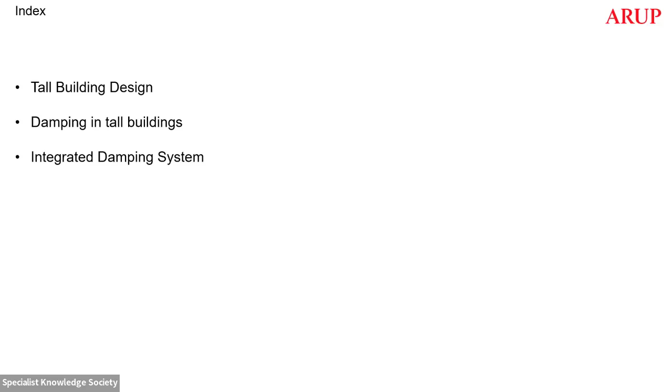I've worked through my career on a series of tall buildings. You can see a few of them. The one I'm most proud of is the last one, BDO Unibank headquarters, where Pedro, who's sitting in the audience, also helped me work on it. It's now under construction, so let's see what happens.

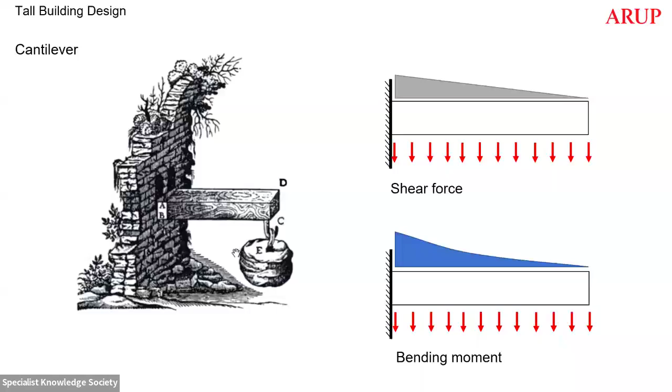If you go straight into the topic of damping in tall buildings, a tall building is as simple as a single cantilever, where you have loads which are the horizontal winds applied to it. In a similar manner to any normal cantilever, to have an efficient cantilever you want to make it as deep as possible and concentrate the masses at the corners. That's the same as we see in a tall building, where we have a vertical cantilever with a horizontal load applied to it, call it wind or seismic. That's the basic behavior. There's nothing more complex than that.

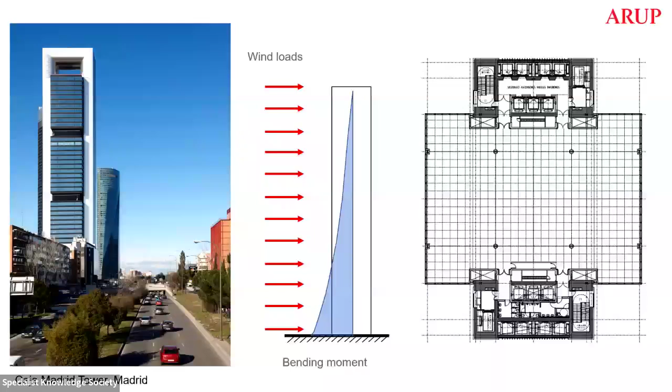What we want to do, same as with a standard beam, is place the mass at the ends and have them as far apart as possible. That increases our stiffness and efficiency. It's not the same having a chunky beam as having a relatively deep and slender one. We generally place structural mass, referring to concrete, because concrete behaves really well in compression and adds stiffness to the building. It's a really good material for tall buildings.

The example I'm using is the Caja Madrid Tower in Madrid, where the two cores are very efficient because they're connected and the structural mass is far away from the corners. We have a weak direction, hence the mass is concentrated at both ends in the other direction as well. But it's as simple as a tall cantilever, and the same applies to the Commerzbank tower.

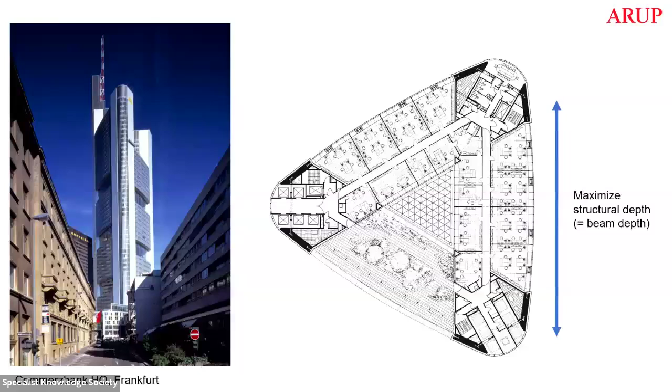The purpose is to make our beam as deep as possible, so we place structural mass at the ends. Sometimes there are other constraints - that's the beauty of tall buildings, there are so many things interacting that you cannot over-design. You have to be very efficient. There are many interactions in construction, services, views, fabrication, so there's variety: a central core, which can sometimes be beneficial, or mega frames. It all depends on your specific site, your program, and what you're trying to achieve.

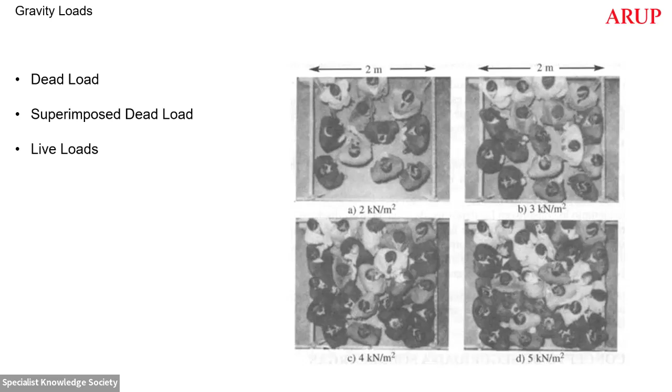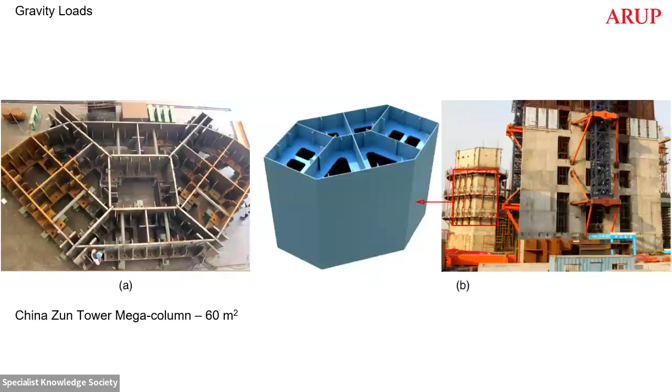And that is especially because loads matter. This is the column at the ground floor of the China Zun Tower, which is a 60 square meter column, quite a large apartment. You could actually live within that column, so it's a question of whether you want elements that size in your building, or if you can make them more efficient, because it adds a lot of value. It's not so much reducing them as being smart about it.

But then if we go to lateral loads, we have wind and seismic. Starting with wind, tall buildings are generally investigated using a wind tunnel test. The Eurocode tells you that the moment you're above 200 meters, you need to use a wind tunnel, or for certain slenderness ratios. There's a series of parameters, but it's the standard approach for any tall building.

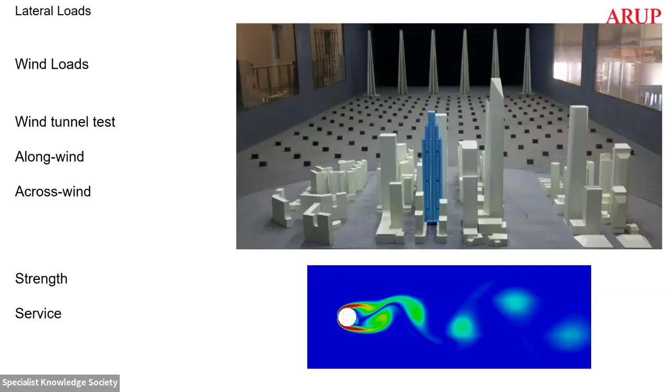Moreover, in the wind tunnel you also check for strength and service. On one side, the ultimate limit state at a 700-year wind, to prevent the tower from collapsing in the maximum storm, but also the service condition - what is the 25-year or 50-year wind for drift and top displacement. And also what ends up governing tall buildings, which is accelerations.

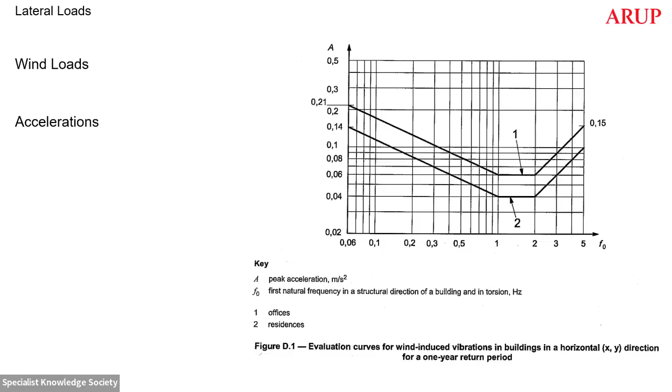Tall buildings tend to be governed by accelerations, usually with a 1-year return period, also evaluated in the wind tunnel. As users, we don't really perceive movement or displacement, but we are really good at perceiving acceleration, translational and rotational. That depends on what activity we're doing - if we're lying in bed we're more sensitive, if we're walking, less. If there's music playing, there's a series of parameters that make us especially susceptible to whether a tall building is moving or not.

Then if you go to seismic, we design it like any other building, following capacity design principles. We identify a series of elements that behave as fuses and dissipate energy. For example, one of the most common things is using concrete cores with coupling beams joining them, and the coupling beams yield in tension and crack in compression. It's like yielding, behaving in a flexural manner to dissipate energy through cracking and yielding of the reinforcement. Therefore, we're able to reduce the seismic loads in the building and avoid over-designing it to remain elastic under a seismic event, as we would with any other building.

The difference for tall buildings is that right now it's very common for any tall building to do performance-based seismic design. Many codes prevent you from doing certain tall buildings, or a relatively efficient version of them, using code procedures alone, so you need performance-based seismic design.

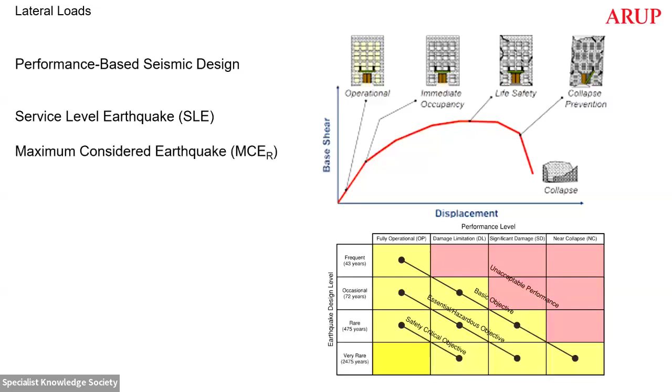What you do there is assess the behavior of the building under the service level earthquake, which happens every 43 years, to ensure that it remains fully operational, and under the maximum considered earthquake - the risk-targeted maximum considered earthquake, which happens every 2,500 years - you want to prevent collapse. For other types of buildings, say airports or nuclear plants, you might have other objectives. That's what performance-based design is about - it allows you to go slightly beyond code, but only checking the serviceability and ultimate limit states.

What we generally design the building for is to remain elastic under wind, and only start dissipating energy and experiencing damage after wind loads have been exceeded or the service level earthquake. In this case, the wind loads are the solid lines and the service level earthquake are the dashed lines. Wind loads were almost double the seismic load, so wind was the one governing the design.

If we were to check the maximum considered earthquake, the base shear is way larger than wind, but that's when we say, okay, there we can accept damage in the material, we can use expected material properties, we don't need to use nominal for all elements - there are more things we can do.

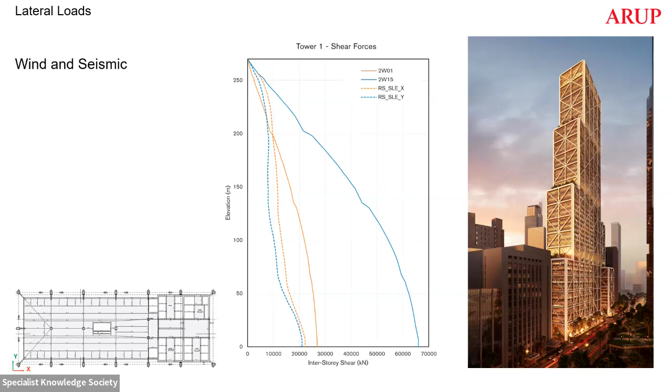But then, as a quick summary, what we always find is accelerations tend to govern. Or if not, it's top building displacement or interstory drift - accelerations tend to be the more common thing. And in order to make sure wind-induced accelerations are within comfort limits...

As the graph I showed you before - you get the wind tunnel test, you get your acceleration in your building, you go to that graph and identify where you are, whether it's for a residential or an office floor, you take each line. If you're above it, it means your building shakes too much and you need to bring it down.

In order to do that, you can either stiffen the building, add more structures, increase the structural sizes, add more elements - which is what was done 50 years ago, but it has been proven that it's not really efficient, besides being costly and expensive.

Then what you can also do is shorten the buildings - sometimes you make it a bit shorter and get less wind loads. Or you do aerodynamic modifications, such as cutting the corners or twisting it. However, cutting the corners means you're losing space, or shortening serves the same purpose - so to what extent it pays off is a question that needs to be looked at.

However, one of the most widely accepted approaches right now is just to provide supplementary damping - that's the most widely accepted solution.

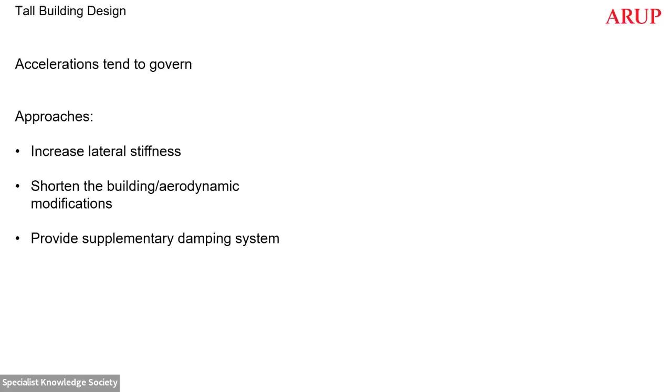So, what is damping in tall buildings? Damping is the capacity of a system to dissipate energy - for example, if we take a ruler and pull it, fixing it at the base, it's going to start vibrating, but the vibration is going to little by little reduce. The rate at which it's reduced is the level of damping. If it has very low damping, it's going to vibrate for half an hour; if not, it's going to stop really fast.

Buildings typically have - well, before I go into that, it's important to note that both wind and seismic are dynamic loads. They're not going to apply to the building as static, even though sometimes we might check them that way. Therefore, damping has a really big impact on how the building behaves dynamically, especially under resonance.

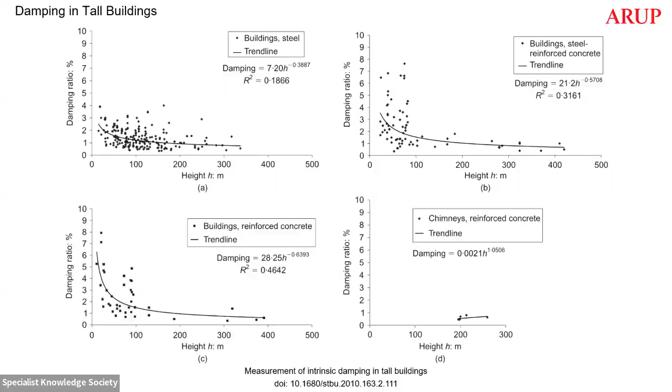Typical buildings have a 5% level of damping, but tall buildings, as we increase the height, the amount of intrinsic damping reduces - a 300-meter building might have around 1% damping. It's also worth noting that this depends on the type of material - you get one value for steel, a bit more for concrete.

But even so, if we think about what is generating damping in a building - it's cracking within partitions, movement within steel connections, heat dissipated. It's sometimes assumed that the more amplitude you get in the vibration, the more damping you're going to generate, but that's not necessarily true, because once all the cracks in the partition have opened and the seals for the facade are broken, you might actually experience a reduction in damping.

So that's one of the points as well - you have to be relatively careful if you assume a relatively large value of damping for your design, because in reality, there's going to be hysteretic damping.

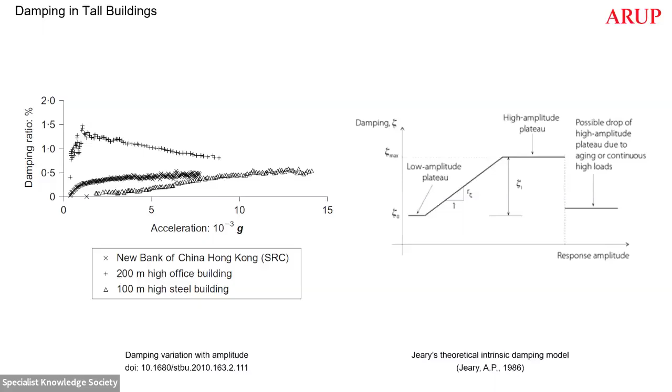For low-rise buildings, you do want large levels of damping. For high-rise with 6 or 7.5%, you're already mitigating most of the dynamic response. You don't really need to aim for 30% damping.

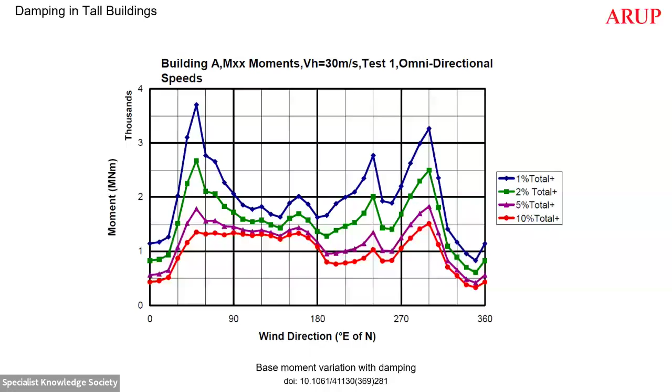We have seen in the East Japan earthquake, and many other recent ones, how many buildings experience large accelerations that lead to significant non-structural damage, which is way more expensive than structural damage, and can lead to significant downtime. That matters for commercial purposes, or even life-critical situations, and can have a really big impact on the community after seismic events.

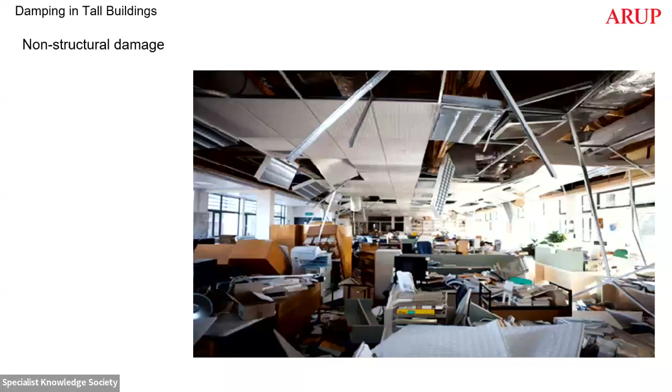So based on all of this, what are the benefits of damping? They can help control wind-induced accelerations, which is mostly why they're implemented in tall buildings, as I'll show you later on. It improves dynamic response, therefore it can improve seismic response, and it can reduce wind-induced dynamic effects.

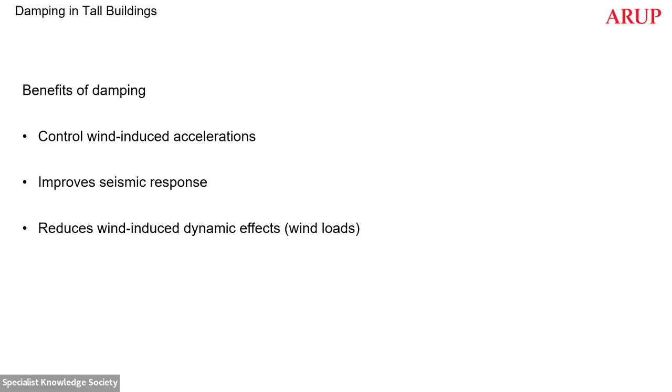If we have a damped system, we can reduce the wind loads because the building is not going to move as violently as before. It's going to be smoother, therefore less demands, and we get savings, as we saw from the plot.

In terms of types of damping systems, we have passive, active, or semi-active hybrid, depending on the level of interaction with excitation. Japan has some active systems relatively well spread, but the most common ones are passive systems. That's because they're more reliable. They don't rely on any kind of energy or active input, which you might or may not have during a seismic event unless you have generators, but passive systems are the most common ones.

In a similar manner, they can also be categorized as distributed or mass dampers—distributed if there are many elements along the height of the building, or a mass damper, which just uses a mass. If you look at those two categories separately, I'll try to give a small explanation.

Okay, what are the examples now on buildings? There is no single answer for what is the best damping system. It's more a relationship—it depends on every single case which one is more applicable, because each one has their pros and cons. Therefore, I think it's also worth seeing them.

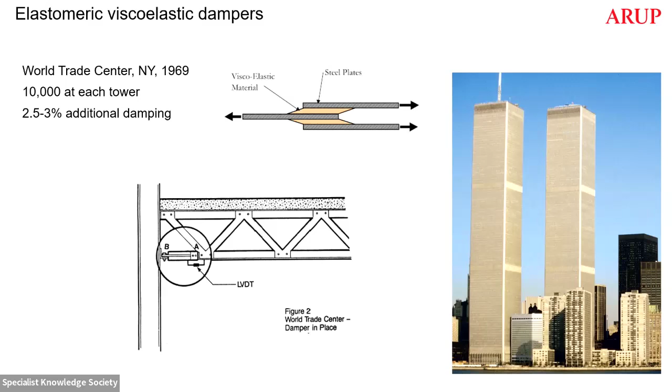The first application of a damper was in the Twin Towers in New York in 1969, where they used elastomeric dampers that dissipate energy by shearing, connected at the bottom chord of the truss to the facade. They were able to generate 2.5 to 3% damping with 10,000 elastomeric dampers. They became really popular to mitigate wind-induced vibration.

For example, on the Columbia Seafirst Center, you can see these very large braces everywhere. They were able to generate up to 6.4% damping—a massive amount of damping.

However, the drawback of elastomeric dampers, especially back in the time, is that they dissipate energy via shearing and dissipate it within the damper as heat. However, they have temperature-dependent properties. So under large seismic events, the material will experience significant damage, and their use reduced once fluid viscous dampers became available.

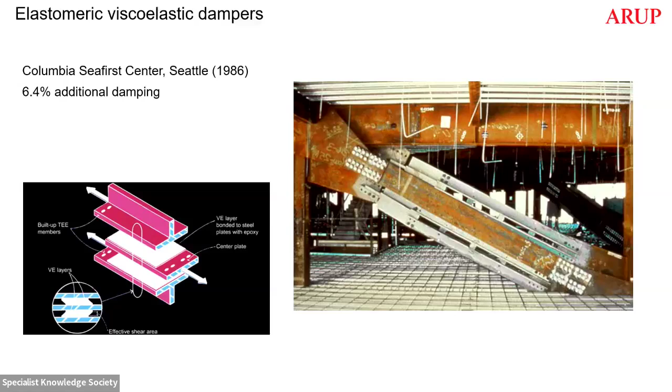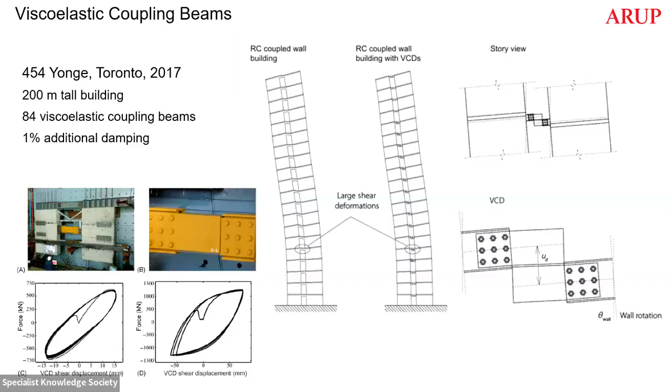Materials have improved throughout the years. A new and interesting application is viscoelastic coupling beams, where rather than concrete coupling beams, we have a series of steel plates with elastomeric material in between, dissipating energy through shearing as the tower sways from one direction to another. These have been implemented in several buildings and tend to show robust behavior even under large wind events.

They generate damping through the differential motion of both ends, passing fluid—typically silicone—from one chamber to another. Interestingly, they cannot resist any static load. This is essentially a shock absorber of a car without the spring, so if you push them, they yield. They can offer resistance to dynamic loads, but it's important to know you cannot rely on them to resist a static load.

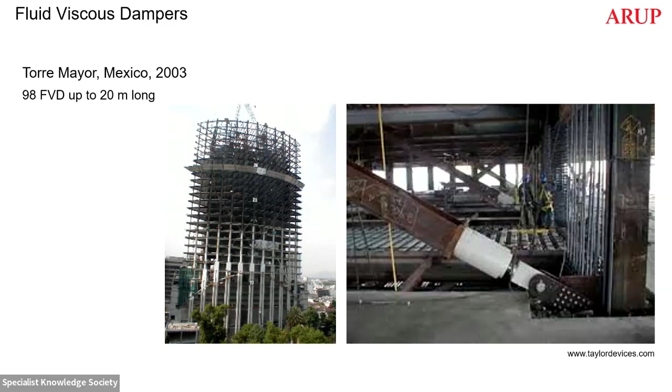They can also dissipate very large levels of energy. They were implemented in the Torre Mayor in Mexico, one of the first cases for seismic applications, where 98 fluid viscous dampers up to 20 meters long were installed, and they proved successful in resisting seismic events.

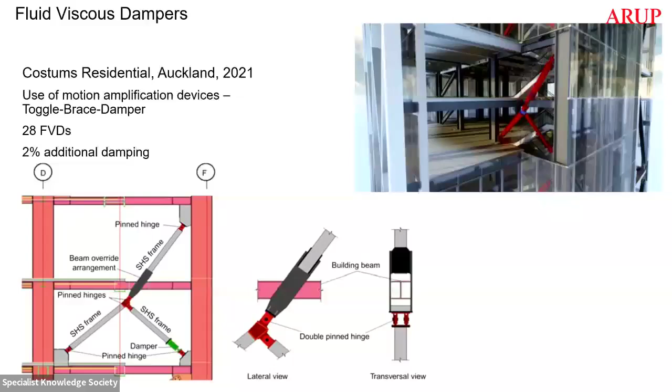More recent applications include motion amplification devices to increase the level of damping achieved, which is one of the challenges with distributed dampers—they rely on differential motion between both ends or damper cells, but in reality tall buildings don't experience very large interstory drifts. They behave more in a flexural manner; a thick core wall at the bottom, say 1.5 meters, won't move much from one floor to four meters higher. So for tall buildings, you generally need mega braces, as shown before for Torre Mayor, motion amplification devices, or other systems that increase the differential displacement between both ends.

That was the same approach for the Scalpel here in London, where we used mega braces around the facade, concentrating the movement from the top down to the setback level to provide the fluid viscous dampers at those points, concentrating the differential displacement over the height. In this case, it was done for wind applications. Interestingly, the dampers cost less than 200,000 pounds but enabled savings of 2.5 million compared to a TMD, and saved up to 2,500 tons of steel along with the proportionate carbon emissions—a very large number that can bring substantial savings.

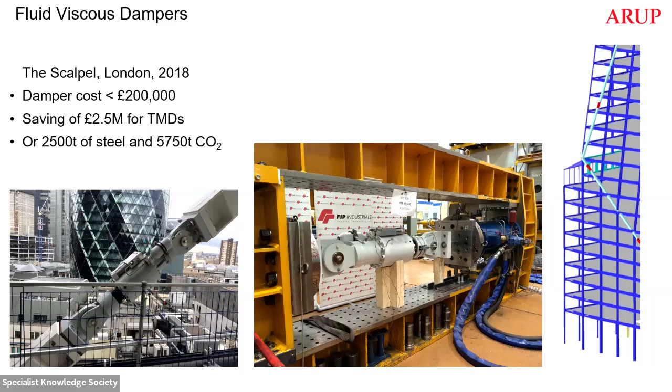Another building I really liked was 181 Fremont Street—really impressive how everything was done. In this case, it was designed for both wind and seismic loads, with dampers working in parallel with buckling-restrained braces, but also using the same concept of mega braces connecting two points at the corners of the building, concentrating the differential displacements on those elements.

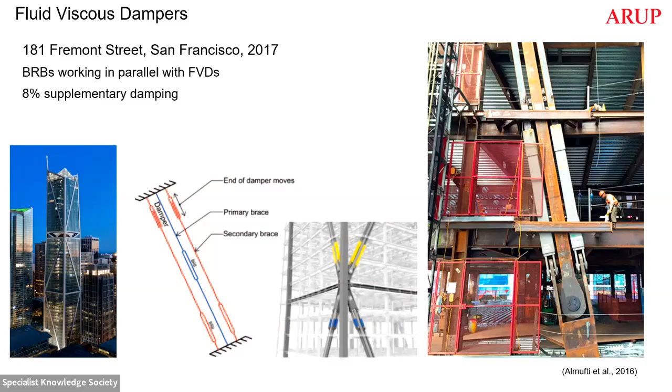Another application is where we want to concentrate large movements or large forces, and we can place the damper there. Rather than having a conventional rigid outrigger, since the outrigger connects the core to the mega columns to stiffen them up, you can replace a solid connection with a damped connection. The good thing about this is that you get really a lot of damping.

The reason it's sometimes beneficial to have a damped outrigger versus a rigid one: for example, these towers in Manila have very high winds and very high seismic demand. These are residential towers, more sensitive to accelerations. If you connect rigidly, you decrease the wind response, but you drastically increase the seismic response, making your building more rigid.

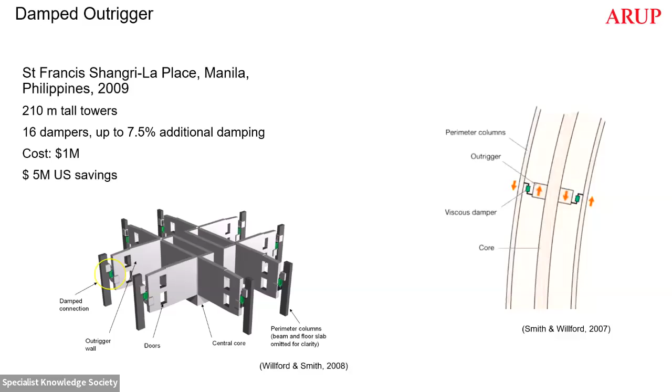Interestingly, these fluid viscous dampers have a very large damper coefficient. They had vertical fins to dissipate energy, and a valve designed with a nonlinear damper exponent. So if there is a very large seismic event, to avoid inducing excessive force in the outrigger, once you exceed the threshold the valve opens, reducing the effect of the damper outrigger and softening the building considerably.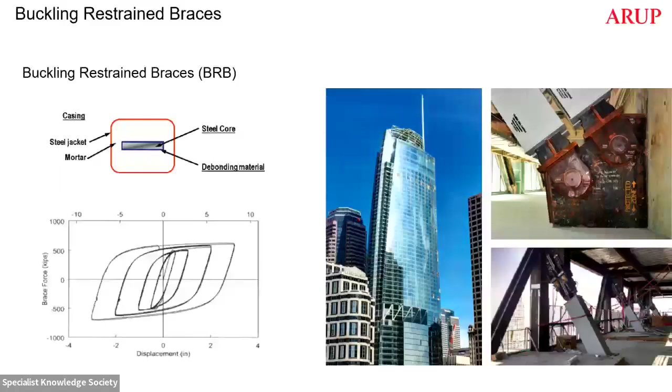Another system, different from the previous one, is buckling restrained braces, which fit within hysteretic devices - ones that experience damage mostly for seismic applications through hysteretic behavior, basically yielding. Buckling restrained braces are formed of a steel core with a concrete encasement. The steel core yields in tension and compression without buckling, thanks to the concrete encasement, providing a very robust energy dissipation mechanism under cyclic behavior compared to normal braces that would yield in tension and buckle in compression.

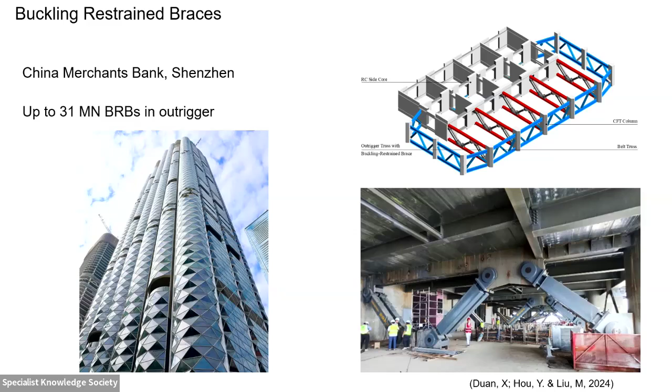We did this for a project for China Merchants Bank - there's a really good paper by Xiaonian, Yuqi, and Minsheng describing it, where we have up to 31 meganewton buckling restrained braces working in parallel for the outriggers to engage the core with the mega column. Also for the BDO Unibank headquarters in the Philippines, we used 19-meter long buckling restrained braces.

The good thing about buckling restrained braces is that you can use them to increase wind stiffness against wind demands, but whenever you exceed that wind demand, they start yielding and dissipate energy in a seismic event. This is an image from Perform 3D showing how all the braces were yielding - once the seismic demand was exceeded, the braces were yielding and dissipating energy.

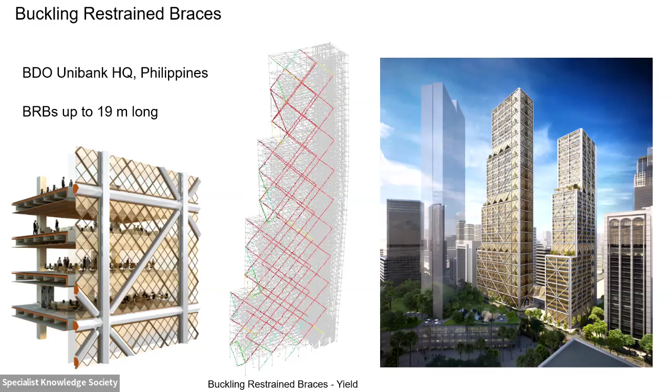Looking at the time history, we see that the buckling restrained braces were responsible for 65% of the energy dissipation. This uses nonlinear response time history analysis, which tracks how the building responds when subjected to an earthquake - the energy dissipated by different components, how much it moves, you can track all of that. We can verify that the dampers perform a really good function.

The last one in terms of distributed dampers is friction dampers, which are now picking up quite a bit - that's for the Abeno Harukas Tower in Osaka, a 300-meter tower, the tallest in Japan. This one has all kinds of dampers: friction dampers, hysteretic, oil dampers, ATMD, dissipating energy by friction at the connections.

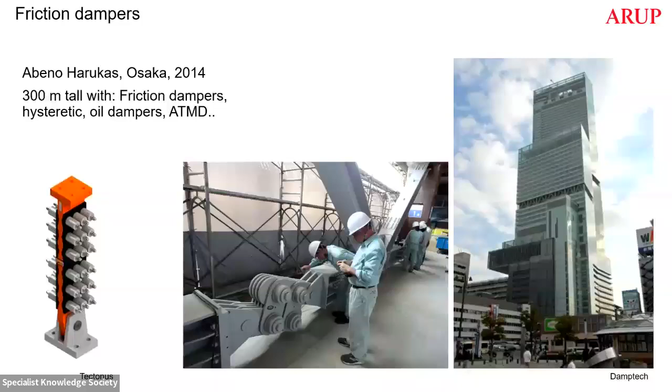The one you see on the left, by Tectonus, is different in that it includes self-centering capabilities, which addresses an issue with buckling restrained braces or friction devices: you have inelastic behavior, but that means extension or rotation in the case of friction devices, which can lead to permanent displacement and offsets in the building that you need to correct later on.

And before we go to mass damping systems, one second.

So that is the thing about distributed damping systems. They're really good because they're frequency independent. They can work really well for seismic response. They're redundant systems, so you can account for them to not just reduce acceleration, but also improve seismic response and wind response. But they're relatively inefficient for tall buildings because of that very small interstory drift and the fact that you need to connect them really far apart to concentrate the movements of several portions.

Mass damping systems are probably the most common ones in tall buildings, and the most common of all of them is a tuned mass damper. A tuned mass damper is based on the vibration absorber: if we have a main mass which represents the building, since every building has a natural frequency at which it vibrates, we add a mass to the top and tune that mass with a spring and a damper to match the frequency of the building, so it vibrates out of phase with the building and therefore creates an equal and opposite force as the building moves. They generally have a mass ratio of 0.5 to 1% and can generate from 2 to 4% damping.

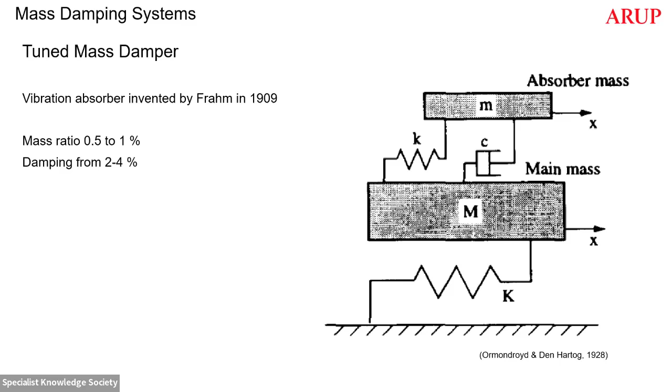Another example could be the Shanghai Tower, where you have a 1,000-ton TMD hanging at the top. As you can see here, the bad thing about TMDs is that they take a very large space at the top of the tower, where space is more valuable. You can imagine the value of all the area that is taken up, especially at such a premium location.

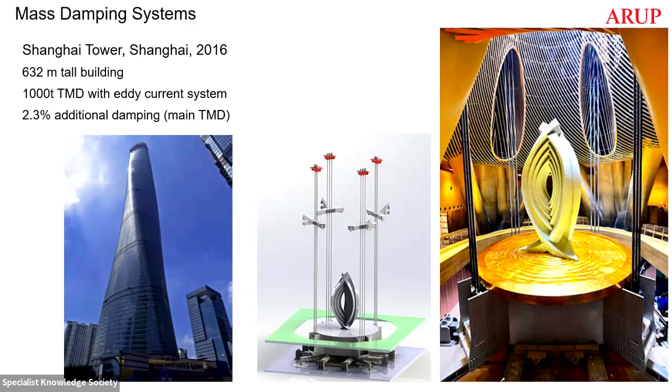But still, they're very popular because they're really good at controlling wind-induced accelerations. They're way better than increasing the size of the structure.

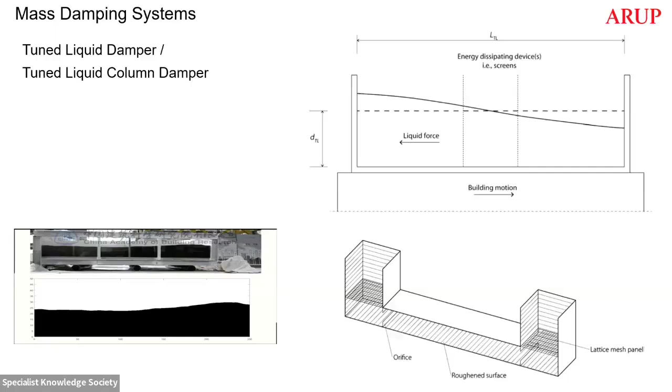Another application could be the tuned liquid damper or tuned liquid column damper, where you use a water tank at the top of a building with some baffles or screens, and dissipate energy as water crosses those screens through friction and viscosity. You need to tune the size of that tank to match the frequency of the building as the water moves from one place to another. That was what we did for China Merchants Bank, where there were 2 water tanks, one on either side, able to achieve from 0.6 to 1% damping depending on the wind scenario.

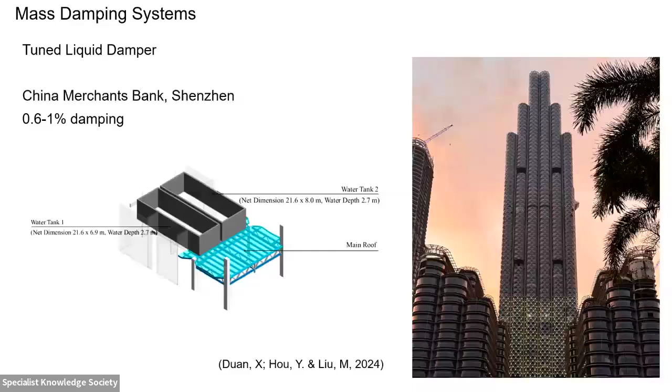So, that was a bit of an introduction to dampers. One of the key themes is that dampers are generally represented by the same 2-degree-of-freedom simplification that I showed you before. We have the main structure as the first degree of freedom, the first mass, and the top mass is the mass of the damper. That's usually accepted and works, giving really good predictions.

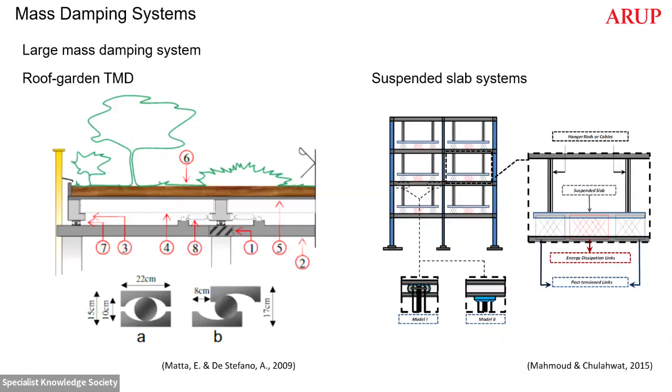There are many researchers investigating, for example, what if we use a roof garden TMD, where you have a heavy garden at the top, which is what many people dream of, and you can tune that to match the frequency of the building? Or what if we suspend every single slab and tune that suspension to match the frequency of the building?

You need to double the structure, with a few implications. Another option is an intermediate mass isolation system - what if we break the building at mid-height and put the top part on elastomeric bearings? Rather than base isolation, we have it mid-height, with the top part behaving as a damper. That's also picking up in Japan right now.

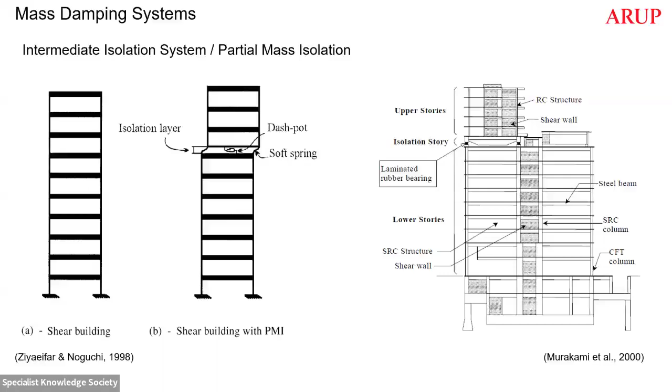Tokyo has just finished one of two buildings of a plot, the Shibaura Tower, where we have a 50-meter portion moved as a partial mass isolation. This works really well for low rise and mid rise, but once you get to a high rise, you're actually creating a soft interface. So in that case, they incorporate an active TMD damper at the top to counteract that. It's beneficial for damping and seismic, but can be detrimental for wind-induced vibrations. It depends on every case.

That takes me to the integrated damping system, which builds on everything we've seen so far. Looking at everything, we know that mass is the parameter that most influences the performance of TMD dampers and how much damping they can generate. But we also know that for a given target damping value - say you want to generate 2% damping - the more you increase the mass, the smaller the differential displacement between the main mass and the damper mass.

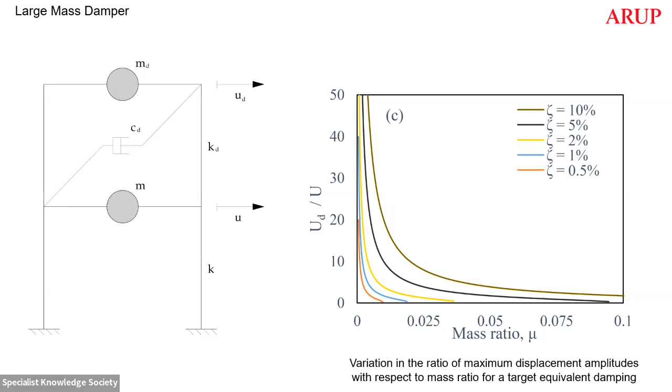Moreover, as we increase the mass, we also increase the robustness of the system. It's less sensitive to tuning and can cover a wider frequency range, so it doesn't need to be perfectly tuned to the building to get optimum behavior, or at least really good behavior. Taking these three concepts together, another thing we can acknowledge is that all buildings move, and it's fine.

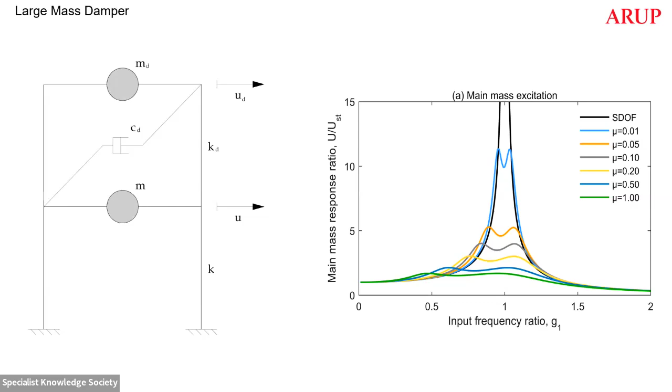The public might not always know it, but as designers, we know the building is going to move - there's nothing really we can do about it. This building is moving where we stand right now, not just because the Earth is moving. It might be millimeters, but we don't really perceive those movements. What we perceive is the change in acceleration. So provided we can control those accelerations, the fact that the building moves doesn't really matter.

So what? The next question is: can we use the building movement for our own benefit? We're used to thinking of buildings as static, but what if we accept it's going to move? Can we enable that movement and use it for our own benefit? That's when we came up with the idea of the integrated damping system - what if we are able to mobilize a very large portion of the building?

One thing buildings have is mass - buildings are extremely, extremely heavy. If we can mobilize that mass and have just a very small differential displacement with regard to the lateral system, we're able to generate very large levels of damping. So we take a usable portion of the building, several floors, and connect it with springs in parallel with fluid viscous dampers - springs to resist the static wind load. We want to control how much that mass moves.

We don't want that mass to be perfectly tuned as a two-mass damper because it will move too much, but we don't need it to be perfectly tuned. We want just a few millimeters - that's going to give us already a very large reduction in response, and that's all we need. We don't need to aim for 50% damping.

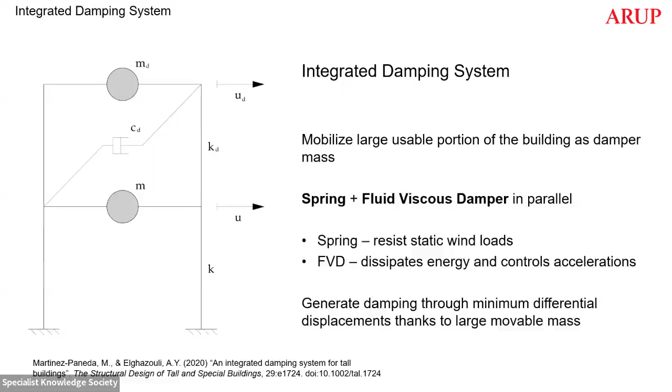Then we have a fluid viscous damper that dissipates energy and also helps ensure the wind-induced accelerations in that portion are within comfort limits, so that mass moves very, very slowly. We can generate damping through minimum differential displacements thanks to the large movable mass. We looked into this using a 300-meter tall building with a central steel core, where on the top third of the building, the floor plate moves differentially from the core.

We have a joint, so the lateral stability system is just a central core, very simple. Then we have perimeter columns, which are just gravity only. And we have a joint between the core and the floor plate, where gravity loads are transferred via corbel.

We have a series of springs in parallel with fluid viscous dampers at 45 degrees to resist the torsional mode, and to control the differential displacement that we can see between the core and the floor.

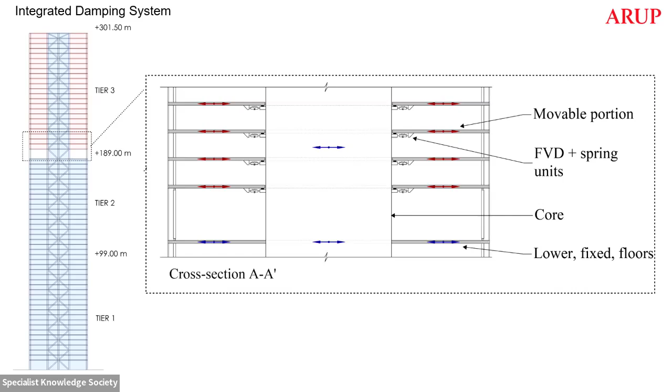You can see another view here. The central core runs continuous through the levels and everything, and you have this small gap between the floor and the core to allow the floor to move differently with partitions, so you don't really see any visual cues or anything. We investigated this numerically, first of all.

We kind of get a simplified model where we have every floor represented as a lump of mass, for the floor and the core, and then we have the spring in parallel with the fluid viscous damper connecting them.

We're able to see, for a maximum differential displacement under the Eurocode static wind load—even though we know wind is never static—out of 150 mil as reference, that we will come back to later on, we're able to generate 6% damping for that 50-year wind load, which is a very large number if you recall what we saw from the previous graphs.

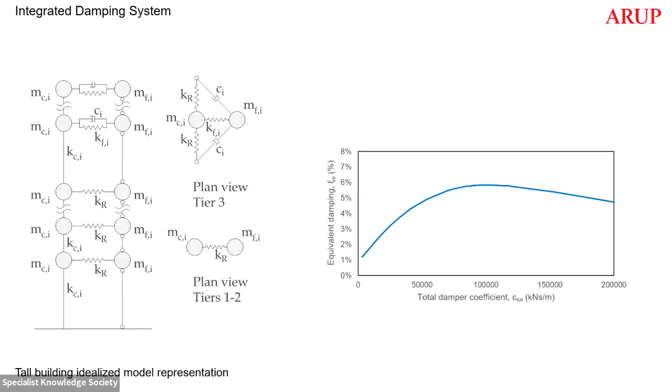Checking as well under seismic, numerically, we found comparing a rigid system exactly the same but rigid to the integrated damping system with a damped response, we're able to generate a reduced top displacement by around 40% under different earthquakes. It depends on how the earthquake is, it changes a little bit if it's more harmonic or pulse-like, but you always see a reduction in response.

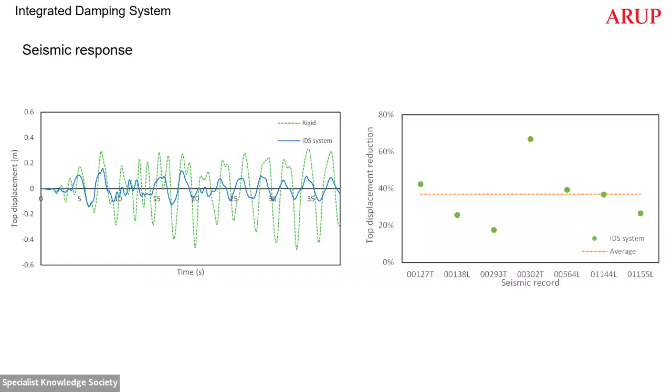I think we're basically isolating those floors from the seismic event—they have no idea what's happening. But even the core sees very large reductions.

And then the differential displacement for 7 records that we tested with scale 0.25 g, so a moderate seismic event, we have an average of 58 millimeter differential displacement. So not that much really for a seismic event.

And then is when we say, okay, we have done all of this work and we managed to verify that the system could actually work numerically as a concept. And that's when we got funding from the Institution of Civil Engineers, and then together between Imperial and Arup, we're able to secure funding to do wind tunnel testing and dynamic seismic tests.

What we wanted to do was investigate this experimentally, so do a model which explicitly incorporated the system. It is not post-processing, especially because the interaction with wind is a bit complicated and not that easy to predict. CFD is not as reliable as aeroelastic wind tunnel testing.

Those of you that might be familiar with wind tunnel testing will know that aeroelastic models are very rarely done because they're very, very complex. In this case, it's quite ambitious, so it was quite an undertaking.

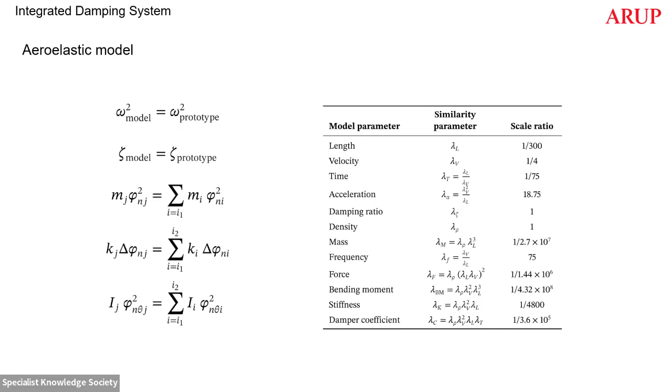We're aiming to do a scale model of 1 to 300 of that same building that I've just showed you. In order to do that, we're able to propose a new system that is currently being about to be published, a new kind of approach to designing aeroelastic models.

We're combining this using GSA Grasshopper. We created a parametric aeroelastic model, so a digital twin of the physical model. We were able to iterate to match the dynamic properties of the building to the model.

As a bit of explanation, for wind tunnel testing you generally do rigid models, either high frequency force balance or high frequency pressure integration, which are rigid models with pressure taps or a balance at the bottom, where you get the wind demands from there.

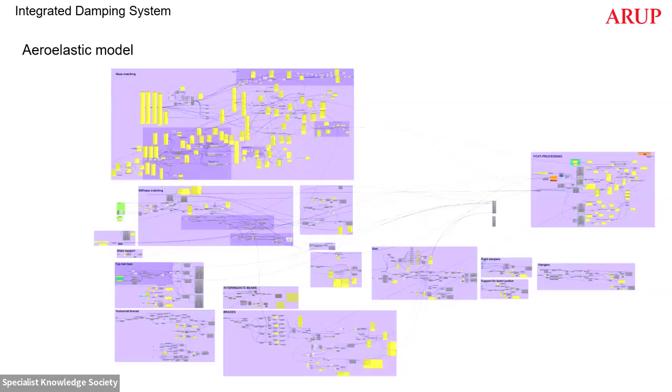Or the most complex part is where you do an aeroelastic model, which is a model that replicates the dynamic behavior of the building. It has to match and be a true replica of how the building is going to behave dynamically, and that's where you can actually assess how it's going to behave in a realistic manner.

Here you can see a view of the building, of the model that we have, where we have a central core. We divided the 65 floors into 6 blocks, where the 4 lower blocks are rigid, and the top 2 are movable.

So we have a series of miniature dampers and a spring connecting those 2 blocks at the top, which are 12 stories each, and they are allowed to move differentially from the core. We detailed them so you could also make them rigid if you want to, just to enable that comparison.

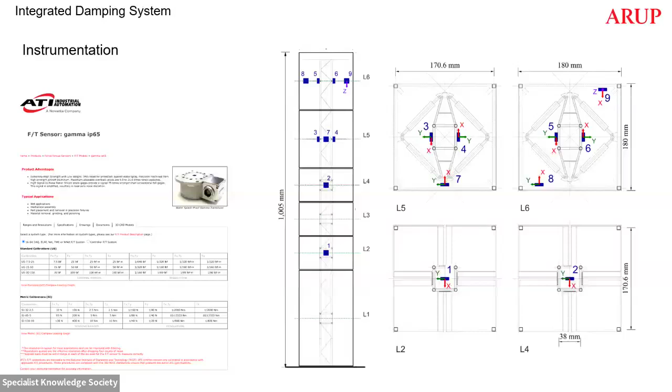We provided the model with accelerometers and a base load cell to get both the demands at the base and the response throughout key levels throughout the height and in all directions.

This testing was done at Imperial College, like wind tunnel testing, aeronautics, which is very, very good. As it was such a complex model, we needed to make sure that the model was a true replica of the behavior, otherwise it was pointless, or we would be checking something completely different. We had to do thorough testing as we were building through every different stage.

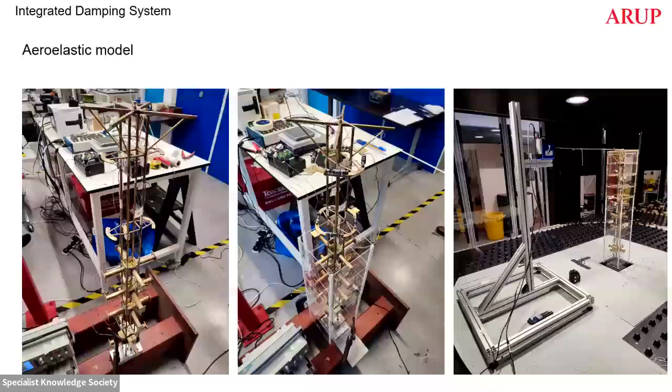You can see a view of the model here in the wind tunnel. That implied weighing every single piece of equipment. At the end, we got a really good match between the target properties and the building properties.

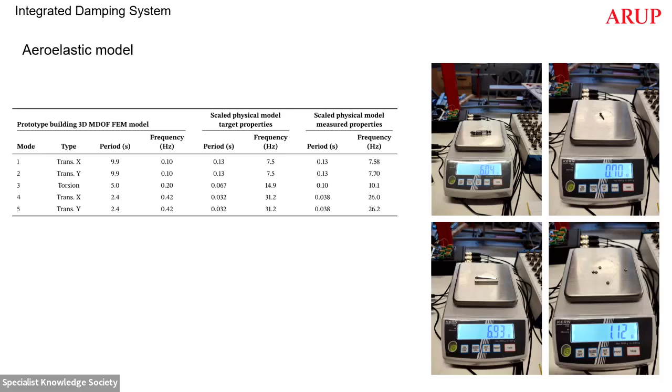Our target was 7.5 Hertz, accounting for the frequency scaling. We got 7.58, which was a very good match for aeroelastic models, especially accounting for the complexity. Here you can see a view of the model.

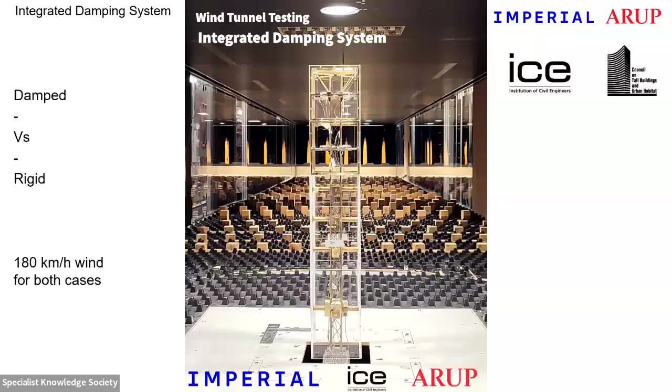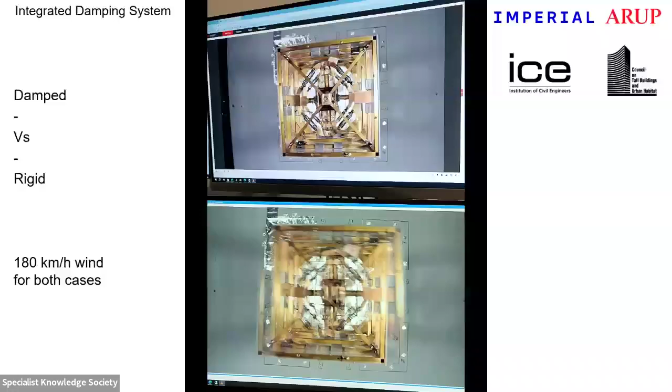So that's damped, rigid, and this vibrates quite a bit more. But there's almost no differential displacement between the skin and the core, just tiny displacements. That's a view of the model.

We wanted to exploit all possibilities. Actually, the top-only configuration worked really well. But you can see that all of them perform really well and well below the demands from the rigid case. It's a massive reduction in response.

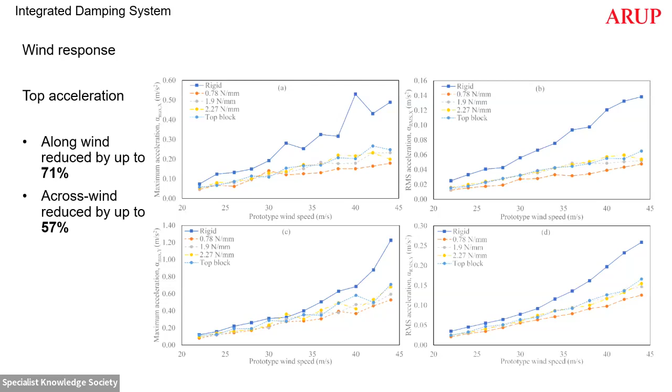We also observe that the test has a bit of amplitude dependency because there's friction, there's stiction in the damper, there's a series of parameters that don't make it as ideal as the numerical model in terms of behavior, but it's still really good response.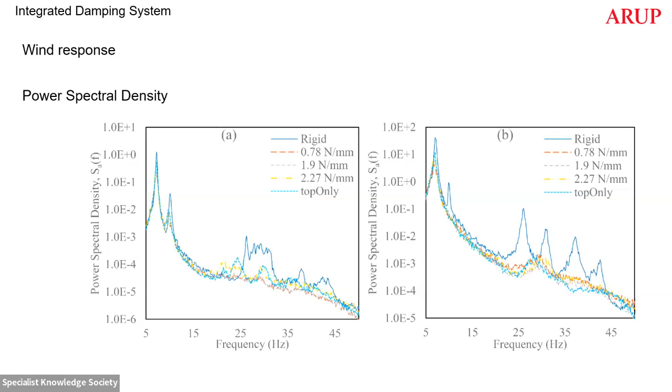If you check the base shear, we're able to see the along wind demands were reduced by 37% and the cross wind by 46%. If you think of the amount of material that you can save just by that 30% reduction, you can drastically reduce the amount of carbon and cost in your buildings.

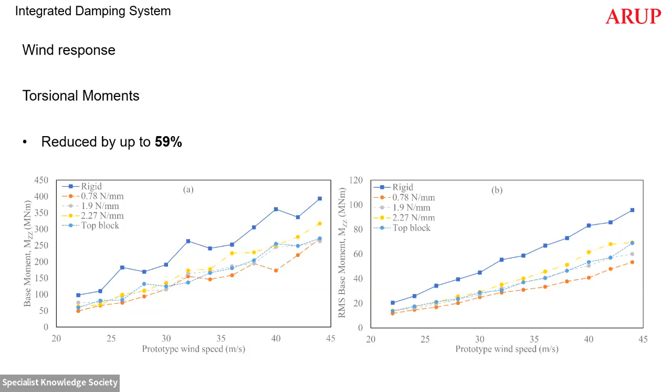And then the torsion as well, which many damping systems struggle with. Just having the damping at 45 degrees, we're able to reduce torsional moments by up to 59%, so the turning moment follows the same trend as the base shear.

If we look now at 360 degrees, rotating the table - the previous values were at 0 degrees, where wind is facing the tower. As you could see, across wind the demands are larger than along wind, because crosswind vibration is governing, which is what you saw on the video - it was vibrating more in that direction than vertically. It's that kind of vortex-induced vibration effect.

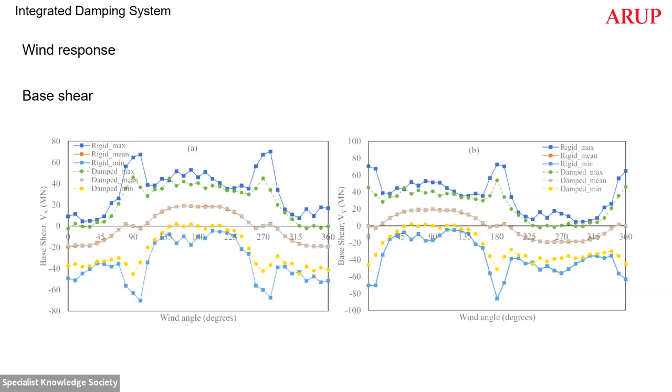As we look across 360 degrees, we see that especially when you have vortex-induced vibration at 0, 90, or 180 in the crosswind direction, that's where you get the maximum reduction and the tower is vibrating dynamically. At 45 degrees there's not such a big peak, but the damping system is still able to drastically reduce the demands on those peaks.

Using the random decrement technique, we're able to get the damping from the time history, and we see that the tower can generate up to 4.4% additional damping - a bit less than what we predicted computationally, but close. It's a physical model, so it's not going to be 100% accurate, and you can see there's a bit of variability.

This is the curve that we see, and this is also a reflection of the amplitude dependency. We could not push the model further because we were afraid of breaking it - that was the main concern.

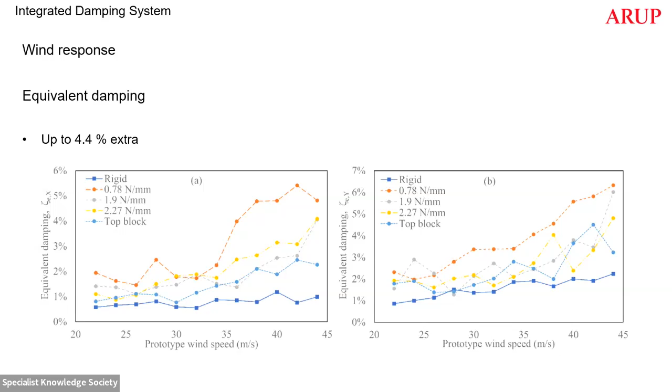Once you see the model at the base shaking quite a bit, we're asking, okay, when should we press the button? Because we're not really experienced with what's going to be the turning point - it changes between every model. We did some seismic tests, as I'll show you, and we didn't want to break the model at that point, or at least until we did the seismic test.

The other main question we had was, with wind tunnel testing, how much does it move? Because we were using that static wind load from the Eurocode, but we know that static wind load from the Eurocode is not realistic - it's just a static load, representative and extremely useful, but not realistic.

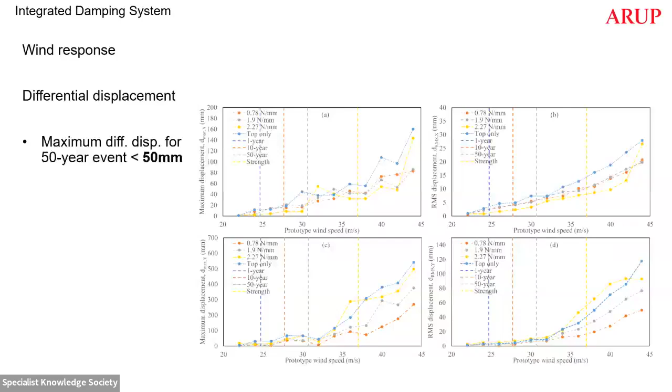Checking for the 50-year event, we're able to verify that all the configurations move less than 50 millimeters at maximum differential displacement. That's a really, really small displacement even for the 50-year event. That actually reassures the large reductions we get just by having a 50 millimeter gap, and the large event is going to move that but you're not even going to notice it. It's something that within MEP detailing is very easy to integrate right now within conventional detailing.

And then we go to seismic.

This will be the last portion of it, so it should be relatively close to finishing.

Seismic test - we did this at Imperial College in the structural laboratory as well. What we basically had was the same model attached to the base. We removed the load cell because we were afraid of breaking it - we weren't really sure what would happen. The load cell could take, I think, up to 30 Newton meter or something similar.

Kevin would be able to correct me on that.

We were afraid of putting these larger loads on it and damaging it, so we just used a rigid base with an actuator in one direction that was going to create the seismic load. You can see a view here of the damper, the model, just the gap, the accelerometers. And then before doing the seismic test, we did harmonic tests, which are very beneficial to see how the system behaves.

So we did a harmonic test equivalent to 3 hours until the tower reached steady state, and then got the peak response at different frequencies. We're able to plot the graph on the left, where you can see for the rigid case, the peak is very, very high, and that small bump is the second mode, which is 7.7 hertz crosswind.

But for all the damped cases, the response was drastically reduced. We're also able to see the differential displacement between the core and the facade, the facade representing the office floor, where we have small masses to represent the office floor. In the rigid case, this peak is because it was moving so violently that even the flexibility of the system was increasing the level of this differential displacement. But you can see that all the damped cases show small differential displacement.

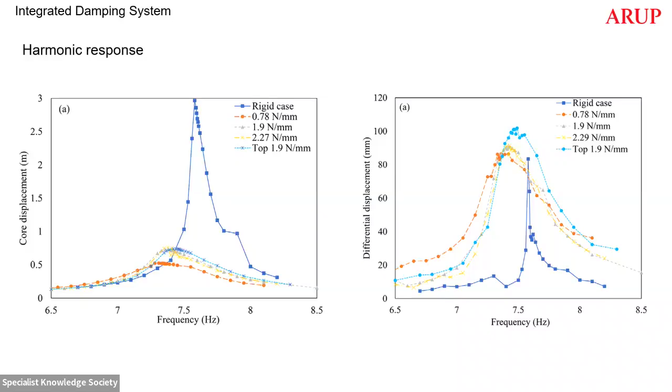Forget about the magnitudes, because it's just related to, if you have a 3 meter top displacement, you can get 120 millimeter differential displacement, but when are you going to have a 3 meter displacement? You might actually have way less.

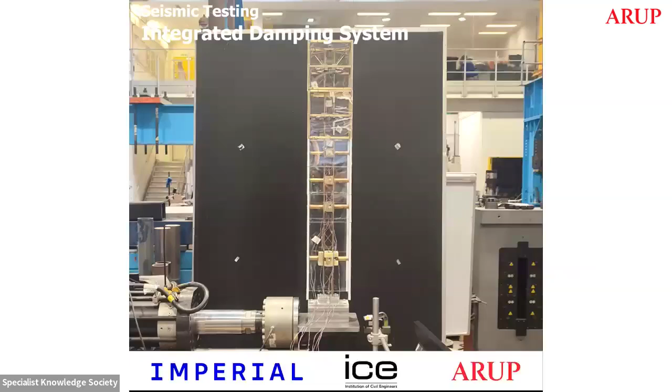And then we look at the seismic response. We took 7 records of different shapes and colors to try to hit it with different things. And what we saw is another video, less graphical than the other one but still good to see, a rigid case and a damped case under the same seismic event. You can see how the damped moves less, the rigid moves more.

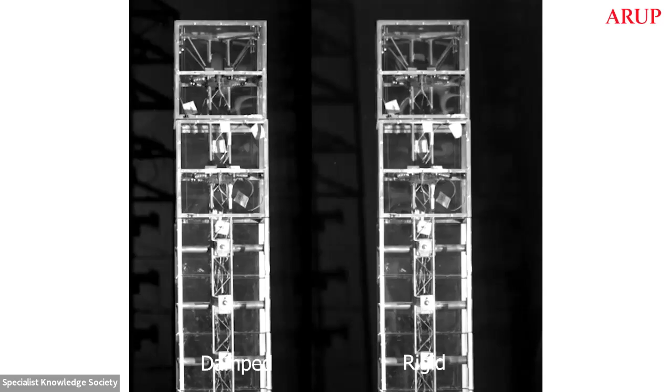The view is not more graphical from the top, but it's still good, you can see how the rigid case is shaking quite more violently, which more or less confirms what we were expecting already from the numerical analysis and the results from the wind tunnel tests, but it's one of those things that's good to verify.

If we look at the seismic time history, that's what we see as well, same color coding as before, blue is the rigid case, the rest in dashed line, and we can see a significant reduction in response. A bit less at the beginning, that's why it performs a bit worse for pulse excitation, but for harmonic it works really, really well because it's able to resonate even though it's not tuned at all as a TMD damper. It's a detuned TMD damper, and we're doing that on purpose, so we're able to mobilize such a large amount of mass.

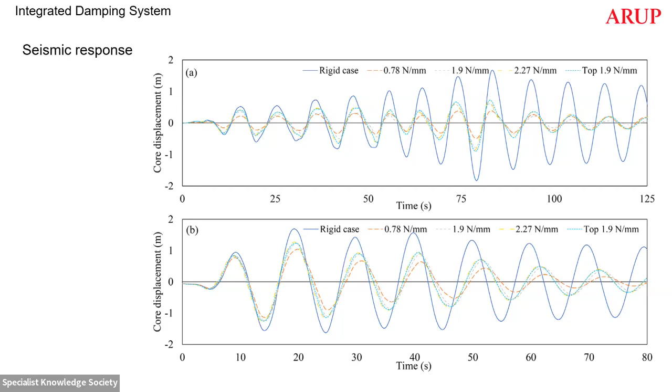But even so, we tested in 3 amplitudes, a low amplitude equivalent to 0.25 G, 0.65 G, and 1.35 G. Hence why you see the different average maximum displacements, how it increases.

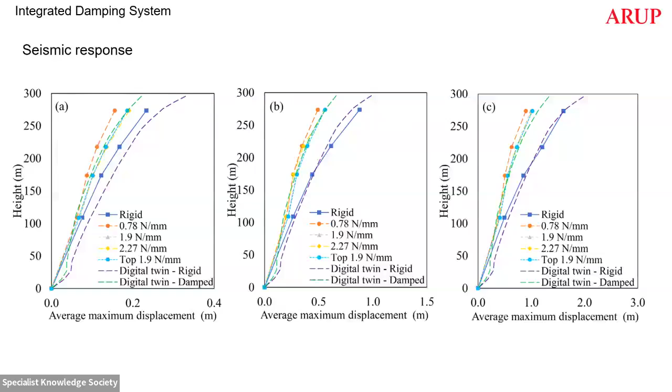And the same questions that we had before: what is the differential displacement? For the average of the 7 records at 0.25 G, so a moderate earthquake, we're able to stay always below 30 millimeters. So it's quite a tiny displacement, not nothing for a seismic event of that magnitude.

And that's the last one. Then that's a bit of conclusions. What I've been trying to do is, first of all, set the scene of where we are, what are the benefits, or the current issues that we have.

But what we have shown is that we're proposing a novel damping system that tries to make the most of what we have. Rather than adding mass to a building, we need to make the most of what we have, and we have lots of mass available. Can we not use it and just enable a differential displacement?

So the system overcomes conventional TMD limitations and is applicable to tall buildings of all heights, as it does not rely on reducing tower overall flexibility. The other systems I mentioned, for example distributed systems, rely on a certain flexibility within floors, so they have a certain height limit because you cannot make your tower more flexible just for the dampers to engage. So they can only be applicable generally up to around 250 meters. After that, they become less efficient.

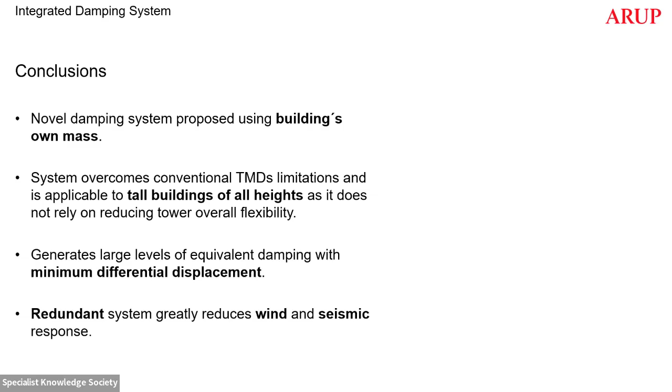And with the numerical and experimental tests, we're able to verify that we can generate large reductions in response with minimum differential displacements. And as well, which I think is a key one, as we're mobilizing several floors, we're able to create a redundant system that can greatly reduce wind and seismic response.

And we can go taller, make our structures more efficient, use less carbon, and overall lead to an increase in resilience from that reduction in accelerations. There's going to be less downtime after a seismic event, and overall better performance.